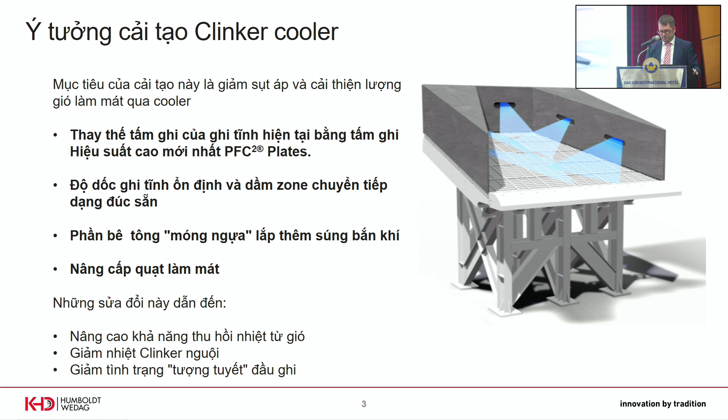even snowman formations. So following one example, what we did in a plant in Lithuania: there we had installed in 2009 the old version of our own Pyrofloor cooler, and the client had some problems with the airflow system, and also snowman build-ups and other small problems. And as a result, we changed the static grate.

The inclination you see on the left side, in the old version, the inclination was 12.5 degrees. We changed it to 15. This is now our standard inclination that we are using there. Then also the air-cooled beam we took out and changed it to the new concrete version, because nearly every 2 to 3 years he had to do huge maintenance work on this air-cooled beam. That's why with the new system he's now been running for more than 4 years without any trouble. So this was also a good point.

Another one you see on the left side, also in the enlarged picture, with the edge that we had there with this air-cooled beam, the material could not go directly to the walking floor area, so he had material build-up problems and so on. And with the new design, we don't have this edge, so we have a direct flow of the material from the static grate to the walking floor.

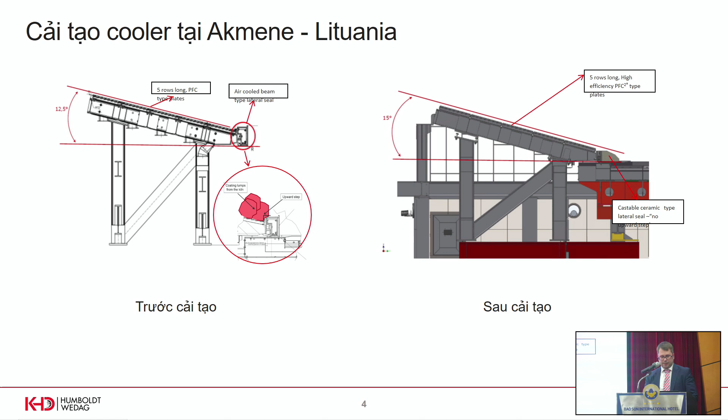And at the end, you can see here the results, that we could increase the secondary air temperature by 35 degrees and reduce the exhaust air temperature by 85 degrees, and the recuperation effect inside the clinker cooler we could increase from 68 to 71%, so nearly 3%. What was at the end a saving in the heat consumption of the whole system of 10 kilocalories.

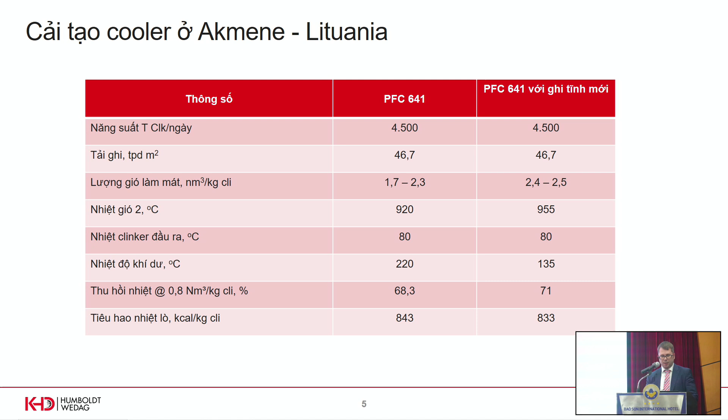In another plant in Russia, we also made a modification. This was not for a KHD cooler, this was an old Volga cooler. You see the differences. There was no static grate already installed on the left side. They had only 2 cooling air fans, one for the first chamber and one for all the other chambers. And with our modification, we first installed an additional static grate for the first chamber.

We made another dividing of the existing chambers. We shifted the chamber walls and installed additional fans for all these chambers. So not that only one fan is supplying the remaining 4 chambers, but that every chamber has its own fan. Then we also modified the grate area. We closed some grates on the side to reduce the grate area in total.

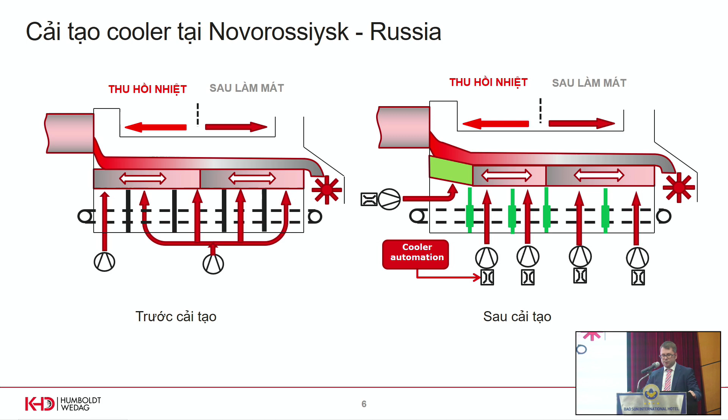And after the modification, you see it here now on the table, the grate load we could increase definitely. And also when you look at the numbers, the cooling air amount was reduced drastically. The secondary air temperature increased by up to 100 degrees. The clinker temperature was decreased drastically. And also the exhaust temperatures we could reduce.

And finally, okay, it's a really old system. It was a wet kiln line, but you see the heat consumption of the total kiln system we could reduce by approximately 50 kilocalories. So just a small modification, not a big issue normally, and you can have really good results.

This was it for this topic, as I told you before. Now Mario has the word for his mill upgrades. And then we can have a good discussion round about your problems, your opportunities and your needs.

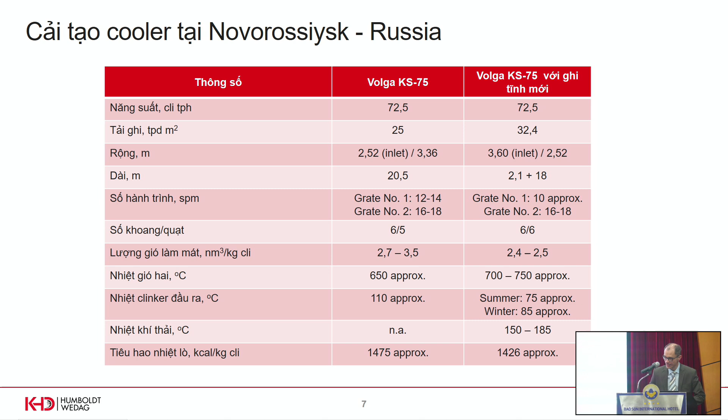So my second presentation is about the upgrading possibilities for existing ball mills. I think this will be a very interesting point for you as an end customer, and what we can do. Of course, when we talk about the upgrading project, we will use our roller press technologies, and we have two things in focus. At first, the increasing of the capacity. We are able to increase the capacity up to 300% when we're using the COMFLEX system. That means the whole package of roller press, static, and the dynamic separator.

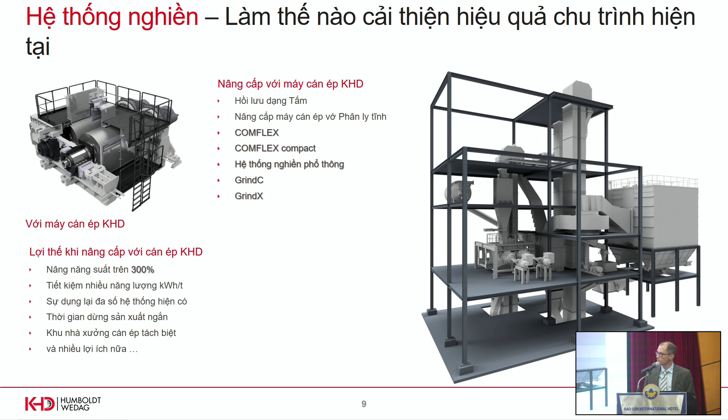So let's start with the easiest way to upgrade a cement mill. You install in front of your existing ball mill grinding plant, which is a closed circuit ball mill grinding plant with a separator and a filter or cyclone for the separation of the cement, the roller press. In this way we can increase the capacity up to 35%.

We call it a slab recirculation, because underneath the roller press we have a special kind of chute. We only use the center material of the roller press and not the edge material from the sides of the rollers. This edge material we transport back to the roller press to pre-grind it again, because the most efficient grinding is done in the center of the rollers, so we take only the material from the center to the existing ball mill.

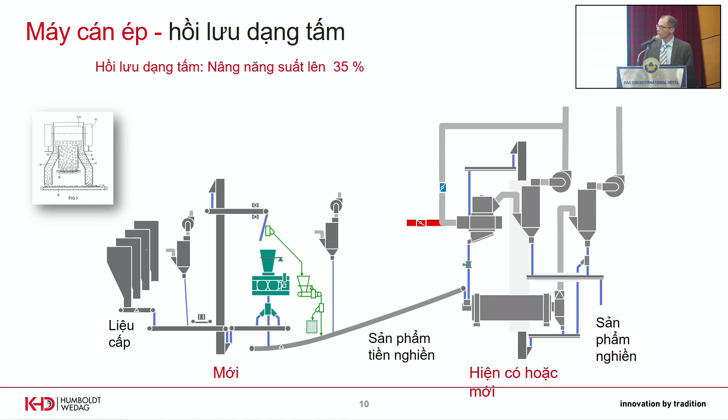When you say it's not sufficient for you, that you need more capacity, we have to add not only the roller press, but also a static separator. We call this one a V-separator, which is also usable for disagglomeration of the material coming out of the roller press, and also for drying the material for the roller press. You can install it above the roller press, but it's limited in moisture. Normally we prefer to put the V-separator underneath the roller press. In this case we can increase your existing capacity up to 50%. This is also, of course, depending on your existing plant.

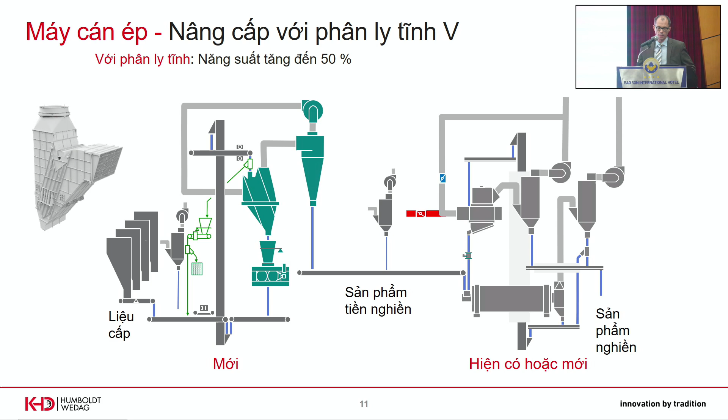Is your separator sufficient for the new amount of material, or do we have to upgrade this one as well? And when you say, no, it's not sufficient, I need much more capacity, we can use the COMFLEX system. That means you have two types of separators, a static one and a dynamic one, and the roller press. In this case, we can increase the capacity up to 300%, with two main points: we need no water like the vertical mills mentioned before, and we don't need a grinding aid to reach the new capacity aims.

So normally a cement grinding plant on your side looks like this, the cement ball mill and the existing separator, and we put the COMFLEX system in front of it. Or when you have an open circuit ball mill, we can also use our separator from the roller press to grind all the material.

We prefer for this system that you run the roller press always in addition to the ball mill with one chamber. So that means we dismantled the diaphragm inside of the ball mill, and we changed the ball sizes of the ball mill to the new capacity. So we decreased the size of the balls because the bigger ones are not necessary anymore, because most work will be done in the roller press complex system.

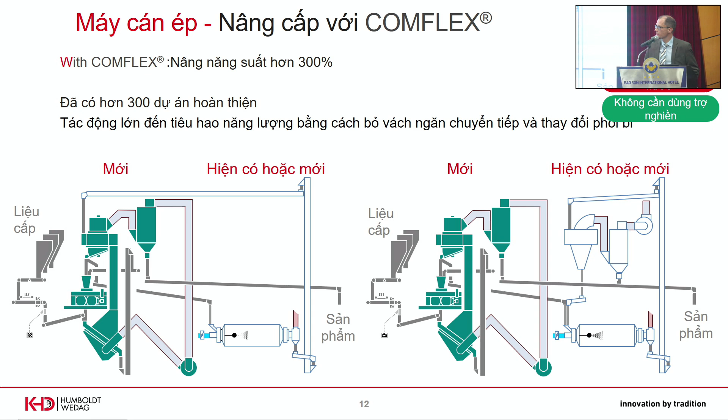This is how a COMFLEX system looks like. You have the V separator, the roller press, and the dynamic separator. We have the same here on this side, but this is a very, very compact version. But here you have some limitations. Here you are free in the choosing of the equipment. You can take what you need. And with this one you have limitations. So this one will be the one where you are free to change everything, take what you need.

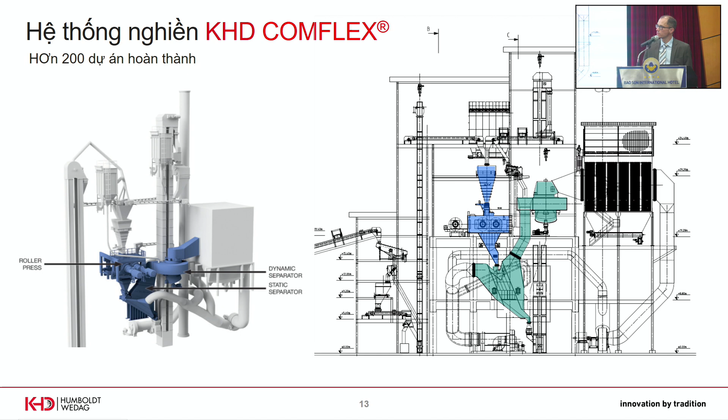And the last type of COMFLEX system is the GrindX and GrindC. It's the same like a COMFLEX, but when you have no space in height, you can put the roller press next to the V separator. That means the roller press does not feed the V separator gravitationally. The roller press feeds the V separator via a bucket elevator. So the indication C means you use a bucket elevator to transport the material from the roller press to the V separator and back to the roller press. And when you have a GrindX version, you transport the material via conveyors between the separate equipment.

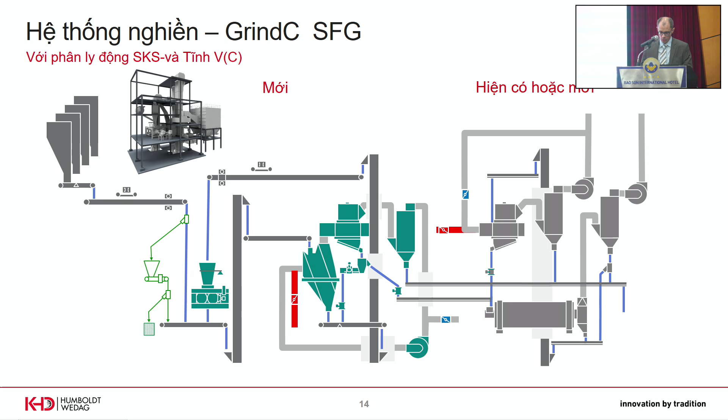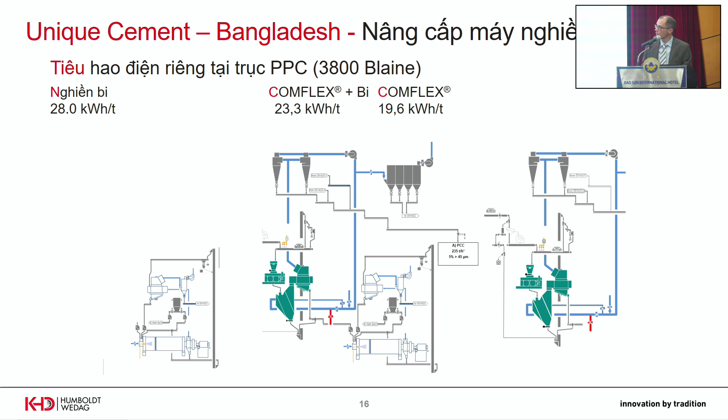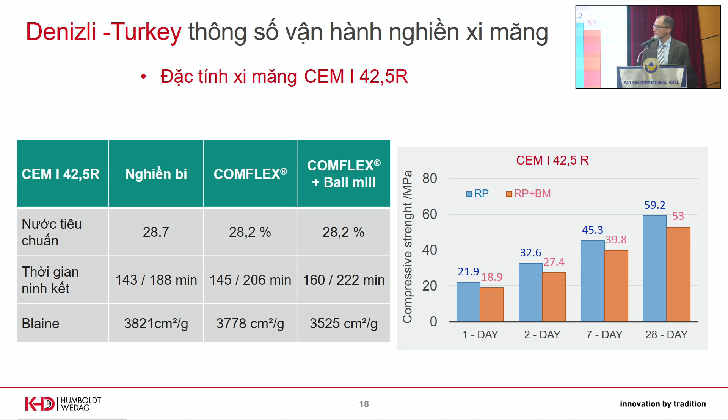And for conclusion, our roller press system is, for upgrading cement mills and upgrading existing ball mills, an excellent way to increase the capacity and to decrease the specific energy consumption, and therefore to save a lot of money. So the main Indian companies or plants are running now saving more than $800,000 to $900,000 per year by using the roller press in front of the ball mills. So this is really a cash cow for the client, using the roller press technology.

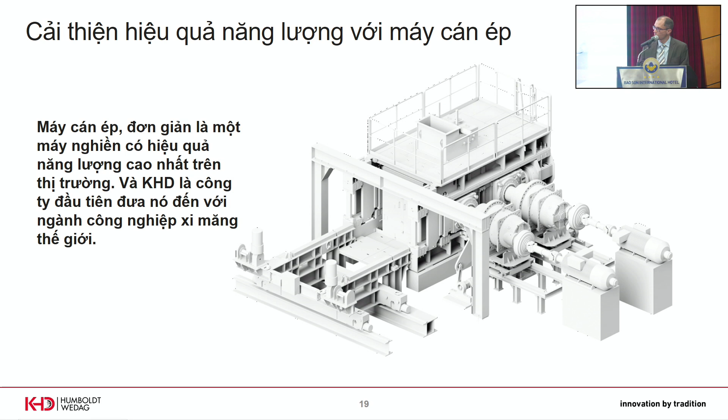So thanks. That was my short presentation. And now we both think we can talk about your questions, because this was the aim of this small round. Not the presentation was the aim. The aim was to talk with you, to answer your questions, and to see what questions are very important for you.